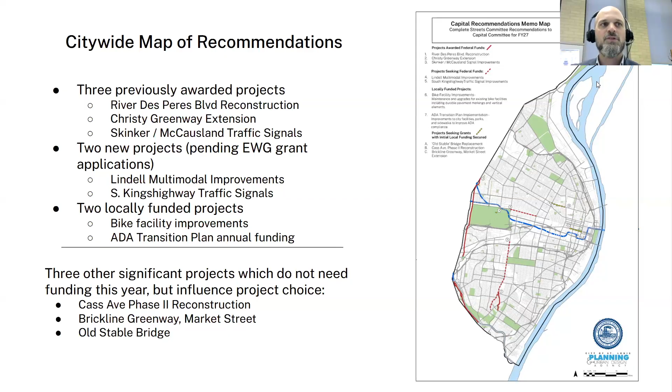Then there's the Brickline Greenway, Market Street, a segment east of 20th Street. This is a GRG-led project, but they have a grant application pending to East West Gateway to extend the Brickline Greenway to the east into downtown. I'm sure many folks have seen the recently completed project on Market Street from Jefferson, or from the MLS Stadium out to Compton. And then the Old Stable Bridge project, which we're noting because that will likely have a fiscal year 28 funding request associated with it.

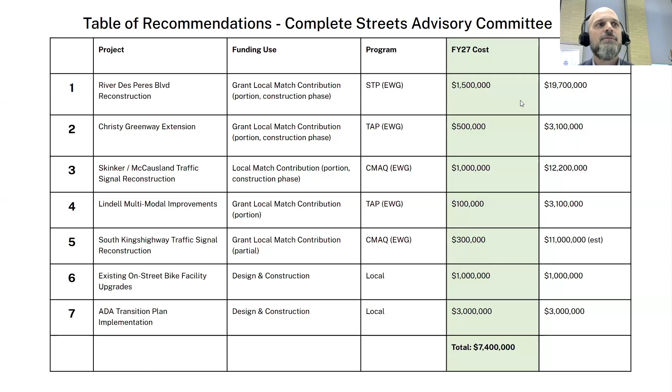Okay, so here's just a table of the same projects I just listed, with the fiscal year 27 funding request and the total project cost. Each one of these is a slide, so we'll get into more detail as we go forward. The first project already has a grant, an STP grant through East West Gateway, so the committee is seeking funding for some of the local match in the construction phase.

So a reminder of what this project is. This is a pretty significant reconstruction project for River Des Peres Boulevard from Lansdowne to Gravois. This section of roadway has really deficient overall roadway characteristics. It's a really old piece of roadway, poor pavement, extremely narrow travel lanes, lack of curbs, lack of guardrail in many places adjacent to the River Des Peres drainage channel. So this project would do a lot of reconstruction for just improved quality of roadway and a much safer roadway.

There'd actually be a little bit of widening associated with this project, which is not very typical of city projects right now, but because this street is overly narrow for the amount of traffic it carries, there'd be construction of a center median to divide the two directions of traffic to prevent crossover type crashes. There'll be multimodal improvements, including much better bus stops in the corridor and access to those bus stops on the east side of the roadway, which are extremely dangerous to access right now, or in some cases almost non-existent. Guardrail installation in some locations, as I mentioned, and likely pretty significant changes at Chippewa, which are in design right now.

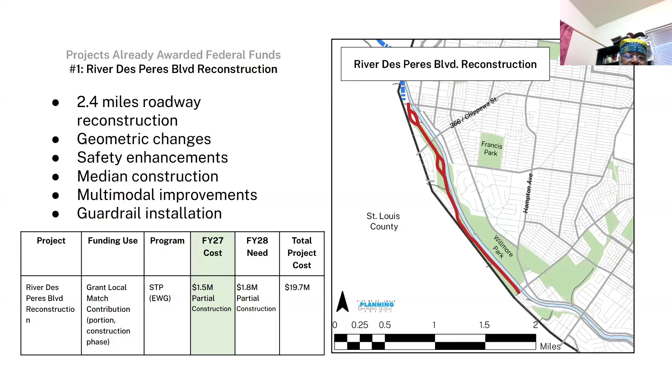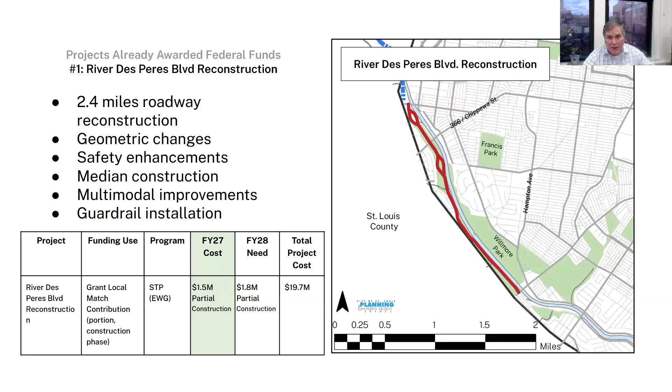So this fiscal year 27 ask is for what we're calling part of the construction funding, or part of the local match funding that's required to advance the project. Dennis asked about the anticipated construction start, and we are on track right now - it's scheduled to start in spring of 2028. Thank you.

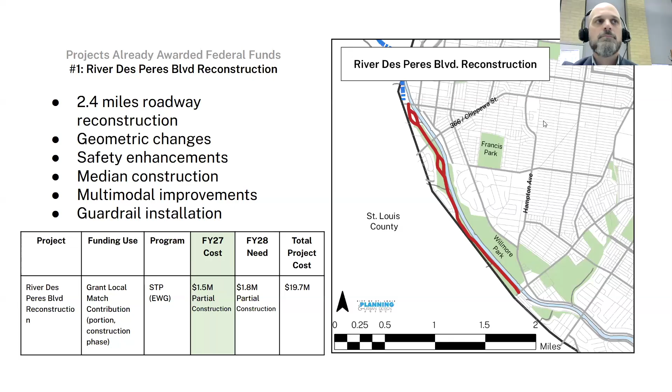Okay, I don't see any other raised hands. So the second recommendation is the local match funding for an extension of the Christy Greenway. This is another project where the city has already been awarded a grant through East West Gateway - in this instance, a TAP grant, which is a Transportation Alternative Program grant. This funding program is primarily limited to bike and pedestrian enhancements or improvements.

This project would extend the Christy Greenway from where it ends right now at Holly Hills Boulevard through Christy Park, along Christy Boulevard to Kingshighway, where some intersection improvements have already been constructed that would link up with this greenway, as part of the Kingshighway ARPA corridor project. So this project would build a sidewalk level greenway on the east side of the roadway, about 1.2 miles, with a total project cost of 3.1 million. The city share for construction is 500,000.

John? And we are under design right now, probably about 25% complete. Anticipate construction start in the fall of 28. Thanks. Dennis asked, is this GRG led or is the city the lead agency on the extension? This is city led, but GRG is not a funding partner in this project, though it connects into GRG's greenway system.

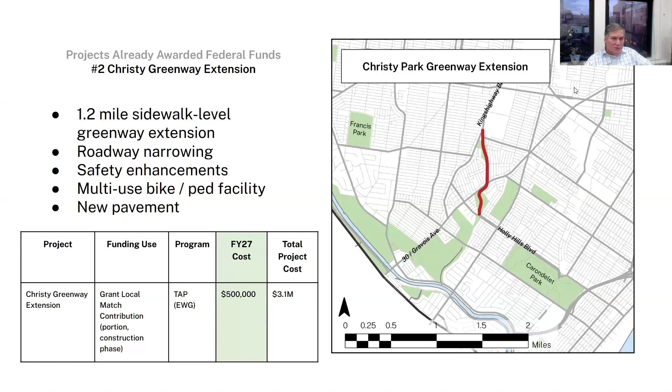Thank you. It also ties into the recently constructed new signalized intersection at Kingshighway and Christy and Neosho. It'll tie into bike lanes that were just constructed on Kingshighway as well. Any other comments or questions here?

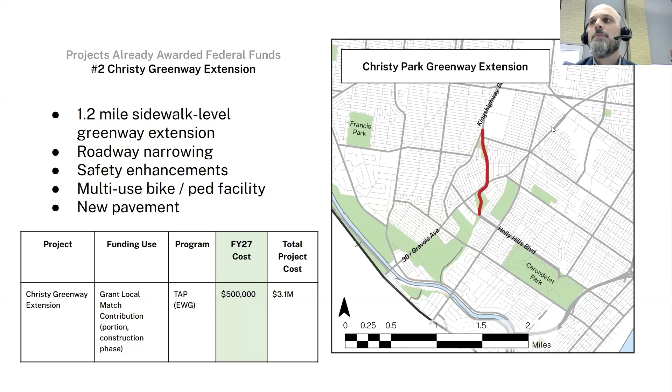Okay, moving on to the next project. Again, this is a third project that's already been awarded some funding through East West Gateway - in this case, a CMAQ grant, which stands for Congestion Mitigation and Air Quality. This project is primarily a traffic signal replacement project along Skinker and McCausland, on the south end from Arsenal, to the north end where Skinker turns into Keeneland and exits the city. It's approximately 20 traffic signals that would be replaced through this project.

There will also be ADA and curb ramp improvements wherever the project is doing signal work. North of Delmar, there are some additional sidewalk and pedestrian safety improvements that will be part of the project. Where the roadway gets really wide, it goes under the Metrolink bridge, and there's currently some deficient or non-existent sidewalk conditions, so the project will make improvements there too. This is partial construction funding of 1 million, with a total project cost around 12.2 million.

Just a general comment about these major signal improvement projects. We as a city have been very successful in building and upgrading our major arterials. This particular project is Traffic Management Enhancement Phase 9, and Scott will talk about Phase 10 on South Kingshighway. These projects improve air quality along major arterials by reducing emissions, so they're looked at very favorably by East West Gateway, giving us cleaner air and better timed corridors.

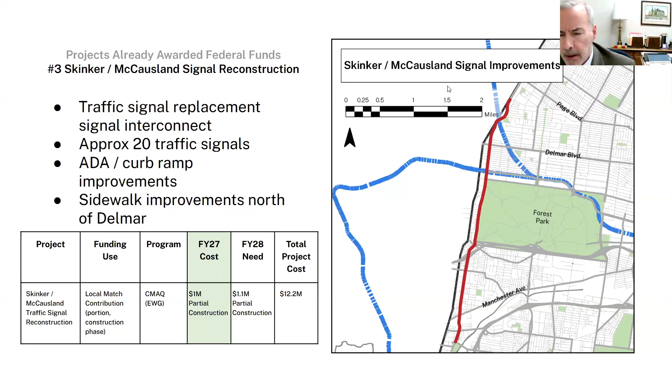There was a question in the chat about whether that's Etzel. Yes, I think the way this map depicts it, the red line stops at Etzel, but thank you for clarifying, John, the project actually goes a little further north to Page.

I'd just pull out a detail in the application. The sidewalk, as shown on the plan, would stop at Horton, which is the first road under the underpass, coming up to the north. So essentially it goes from new sidewalk from Rosedale to Horton, which encompasses the underpass.

And medians and other lane reconfiguration to provide better access for all modes. Another element, Hodiamont Avenue has an unorthodox, skewed tie-in to Skinker. We're planning to take that out and have a better connection of Hodiamont into Skinker that will make it more intuitive for vehicles and safer for pedestrians.

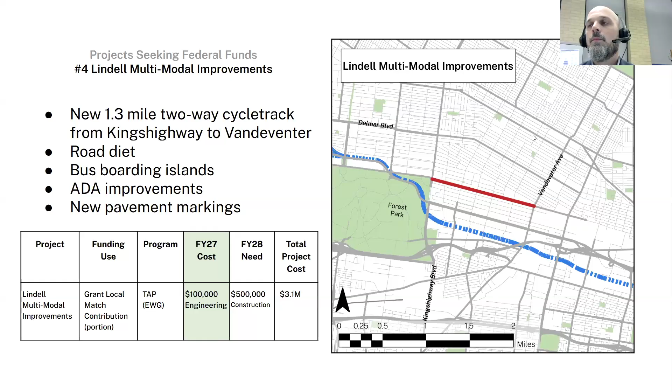Okay, moving to the next project. Again, this is an application the city has pending with East West Gateway. This is another traffic signal replacement project on South Kingshighway, going from McCree to Gravois, encompassing approximately 17 signals.

This will be primarily just a traffic signal project, as this corridor was resurfaced last year and had a lot of other roadway safety improvements constructed. The paving is new, and there's been a lot of ADA work done in conjunction with that paving. So this project is primarily focused on replacing old signals and the underground interconnection between those signals, so they are all tied together.

And so this is the first phase, the design and engineering phase of the project, which would be $300,000. Not hearing any questions or seeing any hands.

We'll move to the two locally funded recommendations from the Complete Streets Committee. So this first one is enhancements to existing bike facilities. The background on this is that for about 20 years, the city, through various programs including East West Gateway grant programs, locally funded programs, and ward capital programs, has been incrementally building out the on-street bike network. A lot of that network consists of conventional bike lanes, signage, and pavement markings.

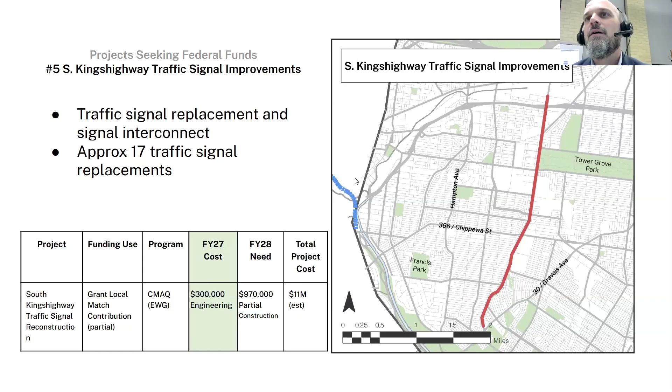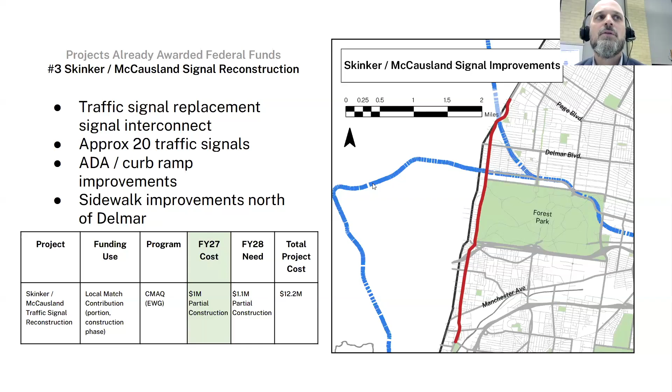These CMAQ projects also allow the capacity to have things like cameras on the signals that can be monitored from, so that traffic operations can be monitored remotely. And then, not on this project, South Kingshighway, but on the Skinker project, that one is primarily signals, but there's also more sidewalk work and lane reconfiguration work we'll be doing, which we talked through a little bit north of Delmar, kind of underneath the Metrolink bridge there.

Thanks, Scott. Essentially, the equipment in the traffic controller is outdated. It's like using an old computer compared to getting a more modern, faster, efficient computer that you can potentially monitor at the real-time traffic center and then modify operations with that more current equipment.

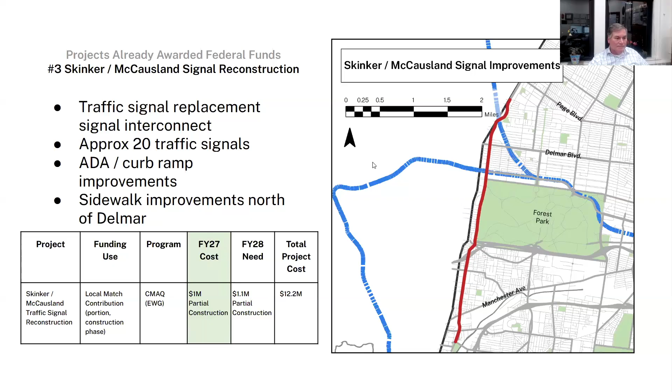Yeah, thanks guys. And actually I did have a question on the bike facility enhancements. First of all, thank you for describing what the facility is. Every time I see the word facilities, I think we're talking about buildings, but technically you're working on infrastructure and the markings and lanes and such. With the $1 million cost, is there a rule of thumb about what that buys? Is there a mileage per mile of the zebra markings or whatever it is that you're proposing to do? What's the rule of thumb here about how much bang for the buck you can get for a certain amount of dollars?

It's a good question. I don't know if I can assign a mileage to it. This is a little bit from memory, but right now we've got about 100 miles of on-street bike lanes in the city, if this figure is wrong, it's wrong because I'm going from memory. And then we've got even more mileage of what we call just signed share-the-road routes, which isn't a bike lane, it's just a sign that says share the road and that sharrow marking. It doesn't all need to be refreshed, but probably 50% of it does need to be refreshed. And that's limited really just to replacing those pavement markings, like the bike lane symbol, maybe some signage.

And then we've got a lot less mileage in terms of protected facilities, just really a few miles of fully protected, parking-protected on-street facilities. And the only place that really needs a lot of work there is Union. The other ones are newer and are in good shape. So we based that figure on some prior capital programs. We have some East West Gateway grant-funded programs in previous years that did the design and striping and installation of a lot of bike lane facilities. So we don't have to really do a lot of design with this. It's really more going back to those previous designs and just refreshing the pavement markings to make sure that they're visible and people understand that the bike lanes are there.

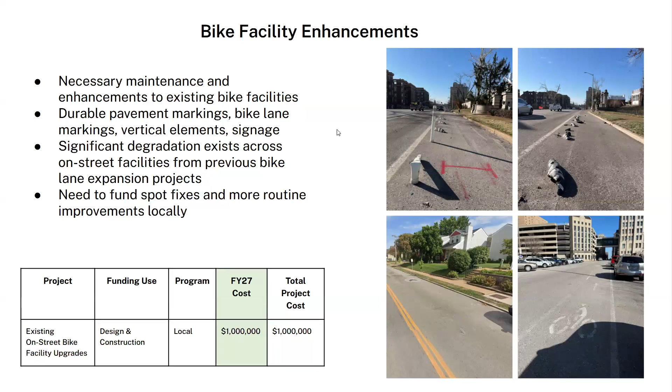ADA transition plan funding. This would be an annual allocation. I think this would be the fourth year that there would be an allocation towards the ADA transition plan, which was officially finished in 2024, but which we really started using even before that. So the transition plan speaks to making all the public services, facilities, and transportation facilities the city has accessible over time. The plan itself identifies some key improvements to make and highlights important facilities we need to upgrade in city buildings and city programs, but also sidewalks and right-of-way.

I think this program, since we started a few years ago, has been really a huge success and has allowed things like parks, sidewalks, restrooms, entrances to buildings, all types of things that are needed to make sure everybody can fully access all public services and buildings, to make those things accessible. The funding is generally being used where there is not another large scale project to do kind of spot improvements to make things accessible. And the recommendation this year is $3 million into that program.

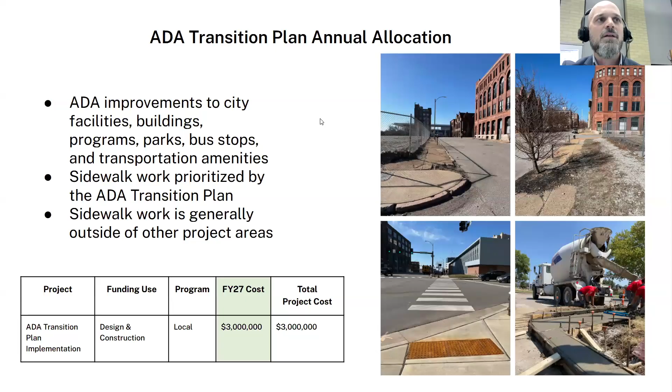Another slide here where I'll highlight some of the things that have been accomplished with this in recent years, including improved access to senior centers all over the city. So those are sidewalks, walkways to those centers and building entrances, Gamble Rec Center improvements, doors at the Soulard Market, which are now accessible, access to Carondelet Park Lake, restrooms on multiple floors of City Hall have been renovated to be accessible. The municipal court and City Hall sidewalk work has begun to make kind of the whole perimeter around City Hall accessible. There's bus stop accessibility improvements that are currently in design.

There's been accessible parking spaces built at Fairground Park and Willmore Park. There's currently sidewalk enhancements on Gravois and St. Louis Avenue, which were some of the highest priority locations in the ADA transition plan, where we don't have other projects. And there's lots more things, sort of too many to list on one slide. But I think this has been really a real bright spot in recent years on making St. Louis more accessible to all residents.

And I think David is on the call. If David wants to expand on anything I said, I think he's welcome to. I think you did a very good summary of it, Scott. It's important to always, in my mind, to point out that what we do is looking for areas that are not accessible and are not likely to be a part of some other project, so that we're trying to make the whole city accessible and let the other projects that comply with ADA standards as they're constructed.

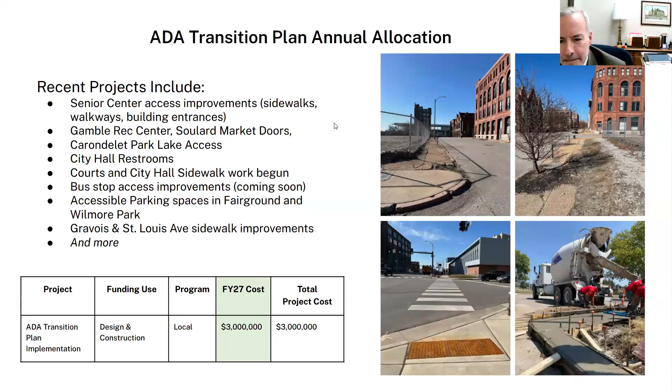This slide is a reminder that we as a city have a lot of projects all over the city, north, central, and south. We're in a period where we are really doing a lot of work. We mentioned 7 projects in the capital committee request, but they're far from the only projects. We have projects big and small in every corner of the city, including the ARPA corridor work and other notable projects, but this is just a short list, not all of them currently under construction, including Tucker Cycle Track, full reconstruction of North Grand, the Brickline Greenway through GRG, Market Street which is just wrapping up, Tower Grove Connector, Manchester Chouteau which MoDOT is moving into the real construction phase of now, and the 20th Street Greenway or cycle track which is fully under construction. So a lot of exciting projects in addition to the ones we mentioned.

And that's the end of my portion of the presentation, and we move to Kevin Trapp. Hopefully Kevin is still here. He's going to talk about bridges.

Lisa had a question, Scott. Oh great, missed it there. Quick question about the Manchester Chouteau project. We live and work along Manchester in the Chouteau area. MoDOT said to us when we asked about bike and some protective measures, because this area is so dangerous, people love to drag race down it. They said that they can do certain elements of a road project, but that the city had to handle the vertical elements. Is that just the zebras and things like that? I wasn't exactly clear what we do as a city versus what MoDOT can do for our roads to make them more pedestrian and biker friendly.

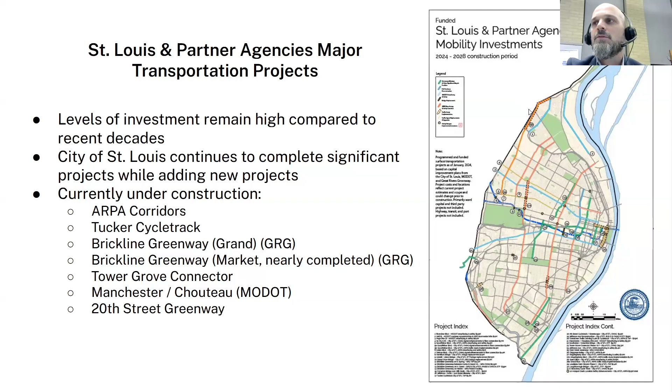Well, I thank everybody for going through these recommendations with me, and I think we can jump to Kevin Trapp now to talk about bridges.

Good evening, everyone. I won't take nearly as long as Scott, but I want to introduce you to a few bridge needs we have in the city. The first two I'm going to talk about are essentially complete in design. We're going through final approvals with the state to get permission to bid, but due to some unfortunate delays during design, construction costs have overrun what we've programmed.

The first is Compton Bridge. This is going to be a complete reconstruction of Compton between Chouteau and Spruce. Not just replacing the bridge, we're also going to completely replace the streets and sidewalk for that entire corridor. We're going to have a 4-lane bridge, and on the east side, we're going to widen it so we have a wide multi-use bike ped facility. It will connect the bike lanes on Chouteau up to bike lanes that MoDOT will be installing on Spruce as part of their upcoming I-64 project.

Our construction budget is about $3 million short, so that is what we're here to ask for today.

The shortfall is due to right-of-way. Because we're widening the bridge, we had to purchase right-of-way from the state, from multiple railroad companies, and from a few different businesses. It took longer than expected. Delays with the supply chain that we've all hit on in the past few years drastically increased the cost of steel and MSE walls, which are two of the main components of this construction, which is why our budget did not hit.

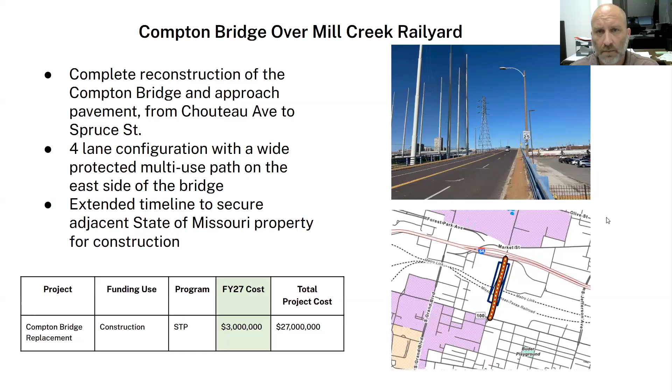Moving on to Southwest and Columbia, our second and third oldest bridges in the city. Columbia we had to shut down a few years ago because it was severely deteriorated and semis were consistently driving over it despite it being load rated for about 10 tons. We had to make that difficult decision, but it really wasn't that difficult because that bridge couldn't take it.

This is Southwest and Columbia, just a little over half a mile west of Kings Highway. The two bridges are right next to each other. They are not tall enough to get over the height of modern trains. This bridge has actually been struck twice by trains, so we need to raise it, but unfortunately we can't raise them where they're at.

So the solution we came to is to construct one single bridge coming through the middle of it. Southwest will have a bit of an S curve—it'll come down, the new bridge cuts through the middle, and then ties right back into Southwest.

We got hit with a big environmental delay due to a building on the National Registry that we need to tear down. It took 2 years to get approval from the United States Department of Interior to tear that building down, which caused our construction budget to miss, and we're $1 million short on our budget.

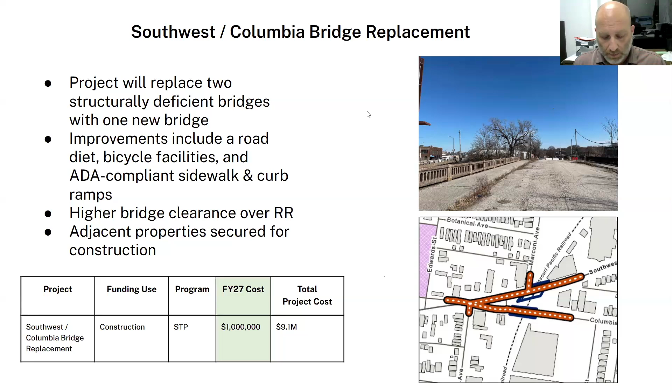Moving on to Old Stable then. This is a small bridge in Forest Park, right outside the lower Muni parking lot. It's probably about our fifth oldest bridge.

It was built in 1922. We applied for federal funding on this in February. We'll know from East West Gateway, I don't know, the summertime, right John? If this one gets awarded.

We'll have a good indication in early May when East West Gateway staff makes recommendations to the Transportation Planning Committee. There's nothing special about this bridge. We're just going to remove it and replace it as is. We're not making any improvements here other than it's structurally deficient. So it's 100 and whatever years, 5 years old. It's just time.

If we get awarded the grant application, our design is already funded, so we will be looking for $660,000 for the local match of construction, which we wouldn't need until fiscal year 28.

Is Forest Park involved with this or coordinating with you? We will coordinate heavily with them. We will go through the Forest Park Advisory Board for their approval.

Yes. During the application process, Bill, Leslie and her staff provided a letter of support, which is included in the application, as well as Greg Hayes, the Parks Director's letter of support. So they're very happy to see a new bridge here. We're also slightly widening sidewalks on each side of the roadway compared to the existing, another 2 feet wider.

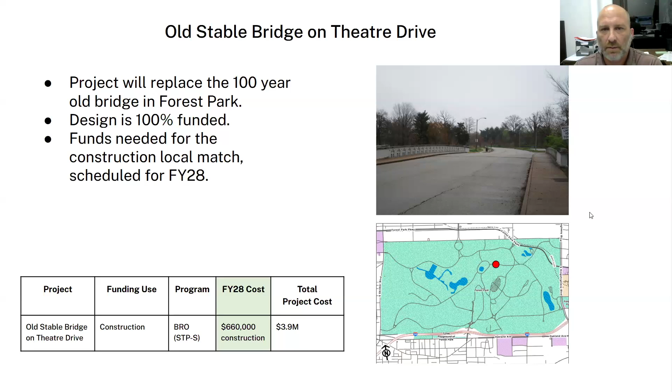It is just a big liability to the city. We are estimating it's about $3 million to demolish. It serves no purpose and it will never serve a purpose. Terminal will never repurpose this into any type of green space on their bridge or anything like that. It's been severed from the bridge. It exists only to be a liability at this point.

Yes. So I saw a board bill this week to turn this over to East St. Louis. Is that, and full disclosure I didn't read the whole board bill, but is that with the condition that the city will demolish it and then turn it over to East Illinois? No, or East St. Louis?

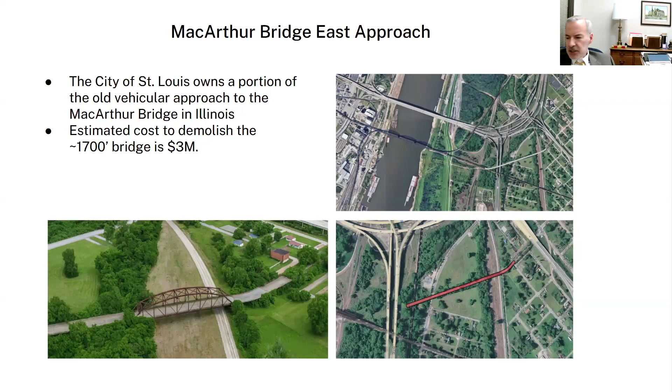Dennis, I see your hand up. Is that from before, or is that now? I understand having staffing issues, and then there's stuff that comes up during project development that's out of the city's control.

But as John and Scott have heard me talk about before, I think it'd still be useful if we can have a project by project schedule on the BPS website so that the residents can kind of see. I think people will be more understanding if we present a schedule on the city's website and then something happens that delays the project, and we can include a reason there. I would encourage us to have a schedule on a project by project basis so residents can check in and see when things are expected. People will be much more understanding when delays happen if they have an idea beforehand that something is going to start at this date and end at that date. So I'd encourage a project by project schedule, not necessarily like a MoDOT STIP laid out 5 years in advance, but at minimum some type of rough schedule that residents can access. And if there is a good reason for the delay, that can be annotated when the schedule is updated. But yeah, that's basically it.